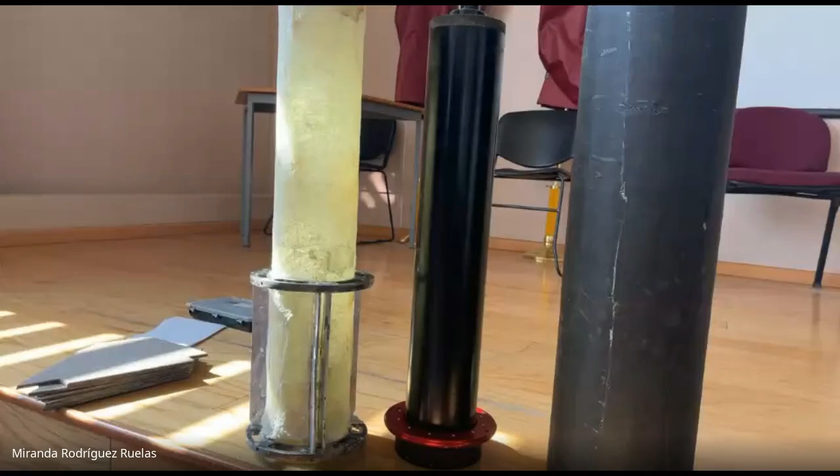And of course, how are we going to be assuring this? We're going to be using another layer of carbon fiber, 12K, and some epoxy resin as well. Once we have that process made, we're going to be working with the tip-to-tip method on each one of the fins, just to be double sure that everything is secure.

Do you plan to cut the slots for the fins in the body tube to the end, and then insert all the body tube with the center rings and fins, and attach maybe with a screw? Because I see in the center rings holes for screws.

Yes, what we're going to be doing is cut the slots on this body tube, which is the lower one, so that we can insert the fins, and then the fins are going to be attached at this body tube. We're going to place fiberglass with epoxy resin, and on the outside it's going to have an extra layer of fiberglass, with the tip-to-tip method.

Okay, but that assembly, what is the method that you use to attach with the body tube? You use a chemical like epoxy to attach the body tube with the fins, nose? So the attachment of the motor tube with the body tube, or the attachment of the fins with the body tube? No, all the assembly of the body tube with the fins, center rings, and the body tube.

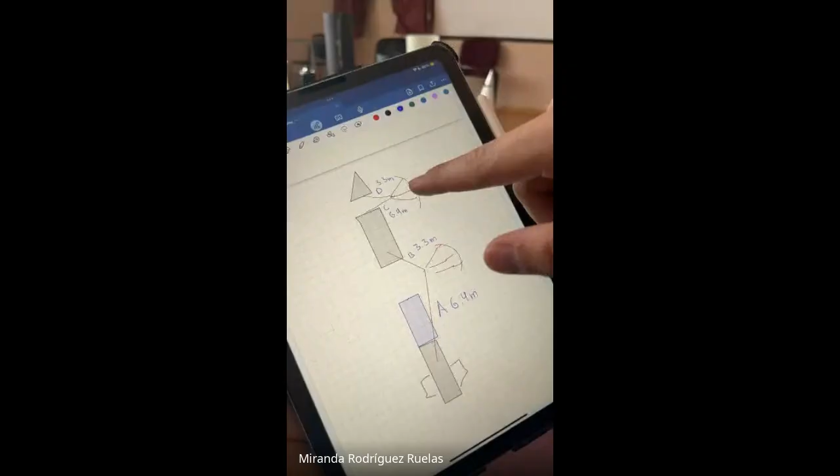3.3 meters from the nose cone to the parachute, and then 6.4 meters from...

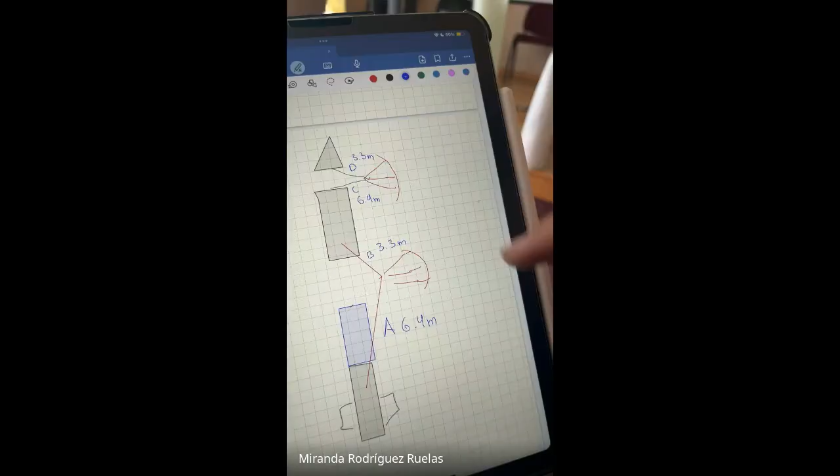The parachute between parts A and B, is that your drogue parachute or your main? Yeah, the one from the middle tube to the upper one is the drogue, and the main is the upper one.

We have a better diagram here. Can I see? Yeah, but that one only has the total length of the shock cord. You have the distance between the components?

Let me show you an example on the screen. The distance from the nose cone to the parachute is 3.3 meters, and from the parachute to the middle tube is 6.4. Then from the middle tube to the drogue parachute is 3.3 meters, and the remaining length of the shock cord is 6.4.

Okay, you can see my screen. Yes. Okay, you have two events during the recovery of your rocket. Do you mention that you have the drogue parachute in the lower frame, just behind the rocket motor? Yes. Okay, then you have this situation.

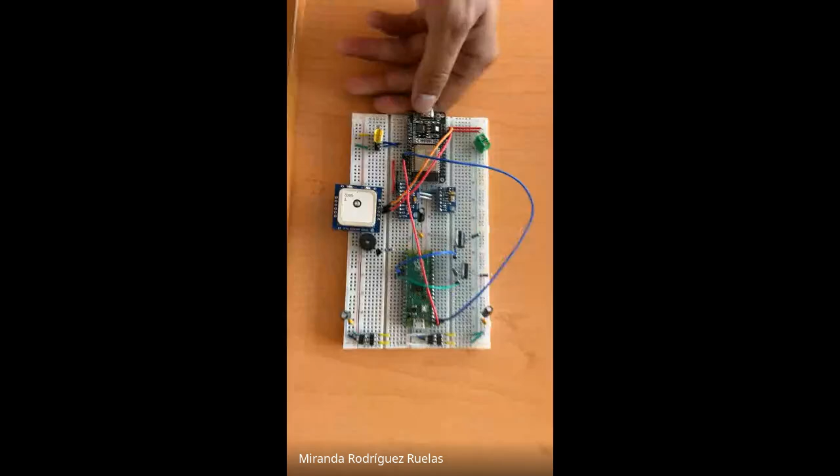For this time, we got a SRAD computer, which consists of 2 parts. The first part is run by an ESP32, which sends telemetry to the ground station. And the second part is run by a Raspberry Pi Pico, which turns on the black powder charges of the parachutes.

Is this your experimental payload, or is it your flight control avionics? Yeah, this is the flight control avionics. And you designed both of the avionics as SRAD?

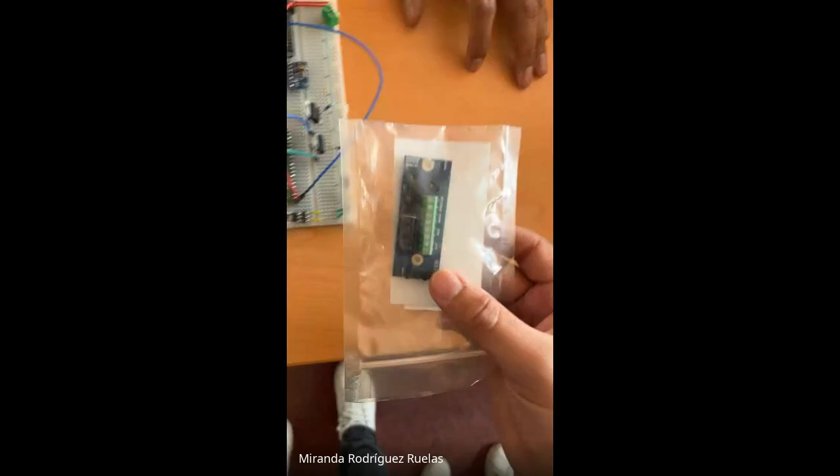You're not using a COTS altimeter. No, yes, we are using a COTS altimeter. Okay, where is it? Well, this is our RRC3, which is the altimeter that we're going to be using.

And you asked where is it at the rocket? At which section? Yes, which of the joints is going to hold your flight control avionics?

Okay, so this body tube, the fiberglass body tube, is going to have the flight computer. And the avionics, which is the payload, is going to be at this middle one too.

Okay, and first, with the avionics, how do you plan to attach the avionics? Is it in some coupler, or is it in the coupler between body tube B and C? So we're gonna be using some steel rings, on which we're gonna be connecting the CubeSat, so that we can make sure the CubeSat is gonna be stable throughout the flight of the rocket.

Okay, where for the payload, where is your altimeter going to be housed? The altimeter is going to be housed on the fiberglass body tube. In what part, coupler or within the tube itself? Yes, the altimeter is going to be inside the body tube, not the coupler.

Okay, how are you going to protect it from the black powder charges if it's going to be in the coupler, or if it's going to be in the body tube? Come again, can you repeat that question? Yes, when your black powder charges go off, if your altimeter is in the same tube with your black powder charges, the pressure wave from your black powder charge will destroy your altimeter. How are you going to protect your altimeter if it's not in one of the coupler tubes?

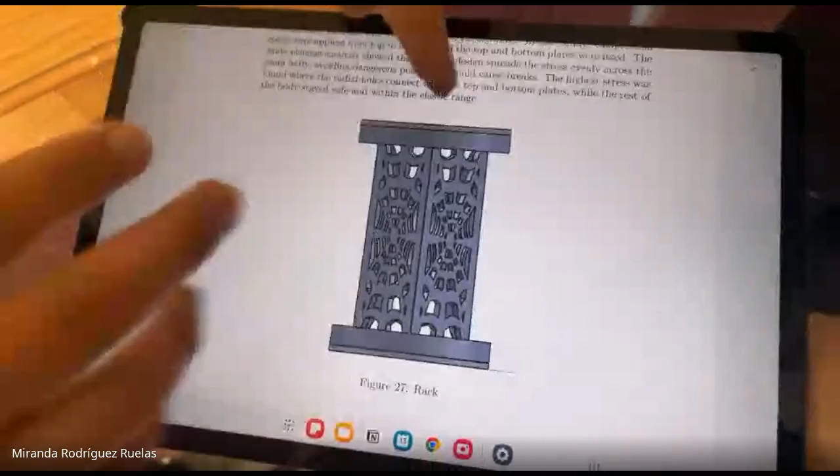Do you have that bulkhead in? Okay, yes, basically. So this is the rack or the bay that we're gonna be using to hold the altimeter. We're gonna be using two of these plates that are gonna be at each of the ends of the rack, and the black powder charges are going to be at the surface, so they're not gonna have contact, they're gonna be separated through this plate.

The black powder charges - so why aren't you putting that rack in one of your couplers? Why is it in the body tube instead of in a coupler?

So actually, this rack is going to be attached to the coupler and also a part of the body tube. It's not going to be completely inside of the body tube.

Okay, I don't understand. Do you, Walter? Let me ask in Spanish.

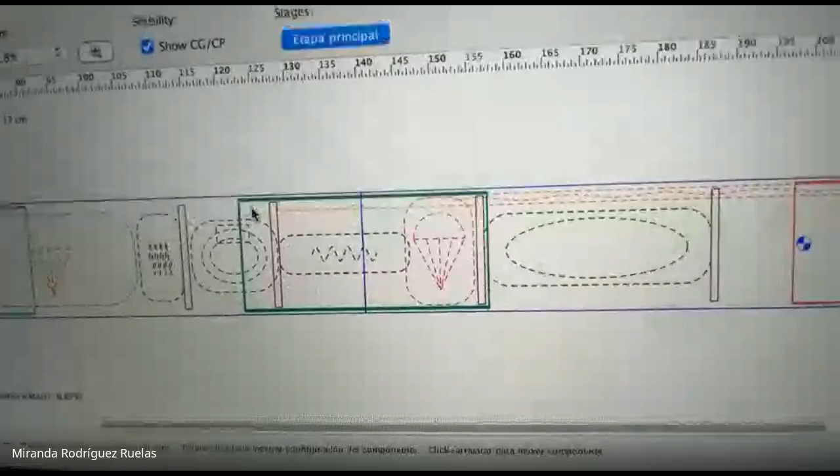Robert, this is the OpenRocket file of the team. What you see on the right side is the payload, then on the left, the drogue parachute and the shock cord. Then in red, do you see a bulkhead? The avionics is in the mouse, the black mouse is the avionics bay. I think there is one bulkhead inside the coupler, and then on the left they have another bulkhead and the main parachute.

That doesn't make sense for me, but... Okay, you understand what they're doing? Yeah, but it doesn't make sense. I understand it and a half, but not at all. Because I don't know why they don't put the avionics in the coupler, it's easier. Let me tell them.

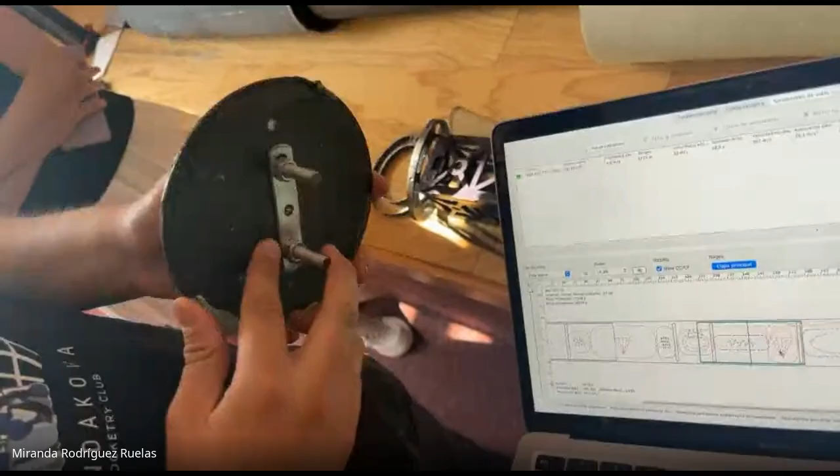Well, ¿va a estar pegado o va a estar atornillado también al fuselaje, como los...? They use screws to attach that bulkhead. Pero dos capas, no de shear pin. And what is it going to be attached to? Okay, o sea, esto va a estar atornillado en el tubo del fuselaje. Ajá, las dos placas. Both of the bulkheads are going to be screwed into the airframe.

How are you going to screw that thin piece of material into the airframe? There's no thickness there to attach a bolt to. How are you going to screw it in place?

¿Estas son las placas que vamos a usar o van a ser más gruesas? Van a ser más gruesas. Okay, so actually the bulkhead that we're showing you right now is not the one that we're going to be using, because the one that we're going to use is going to be thicker so that we have enough space. It's going to have this thickness.

Okay, Walter, are you comfortable with their plan? Because ultimately, it's your call to make here. Yeah, not at all. I need to see the physical components to see maybe the best option, but right now they don't have the component yet. The idea can work, but they have too many risks to pilot. It's not a conventional design.

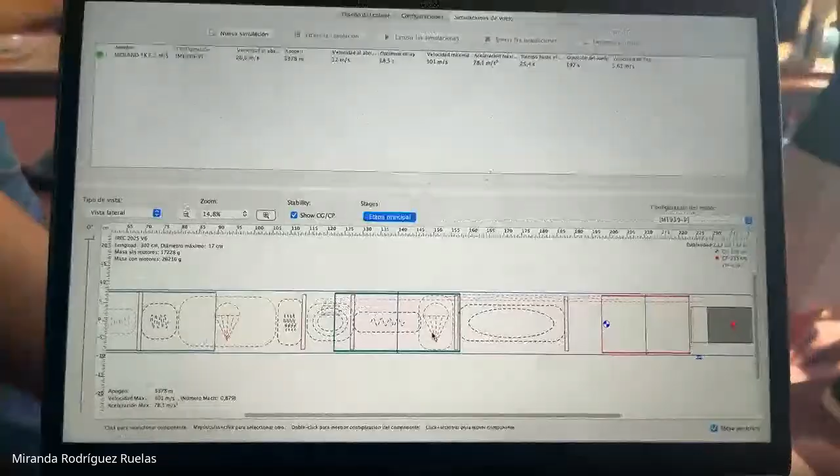So if we lower the payload, the most probable thing to happen is that we're still going to have enough stability. That's the simulated stability, okay? And what is the percent of error that you have between the simulation and the physical rocket? All the weight of the components that you have in the rocket are the same?

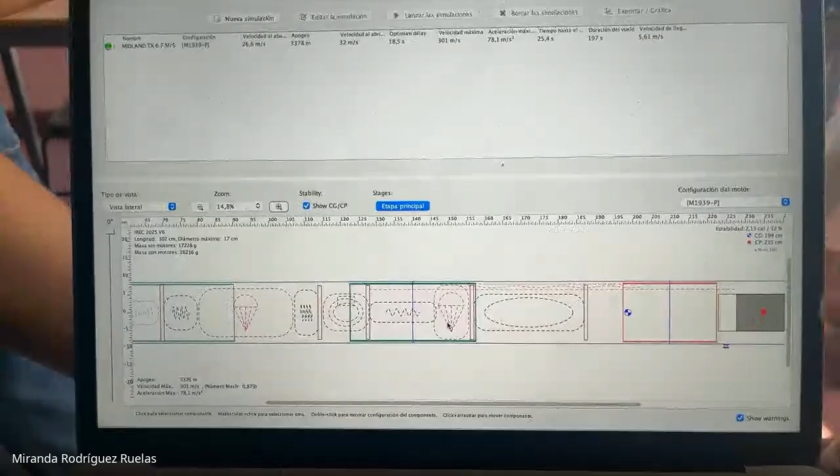So far, all of the weights of the parts in the OpenRocket file are the real ones. The weight of the body tubes, the nose cone, the bulkheads. Most of the components in the OpenRocket file have the real weight.

Okay, because for example, in that OpenRocket file, do you have enough space in the design in front of the rocket motor to put the payload? The A and B airframes don't separate at any moment during recovery. So you can maybe lower the payload, and now you do have enough space to put the recovery, the main and the drogue parachute, and use the coupler like an avionics bay.

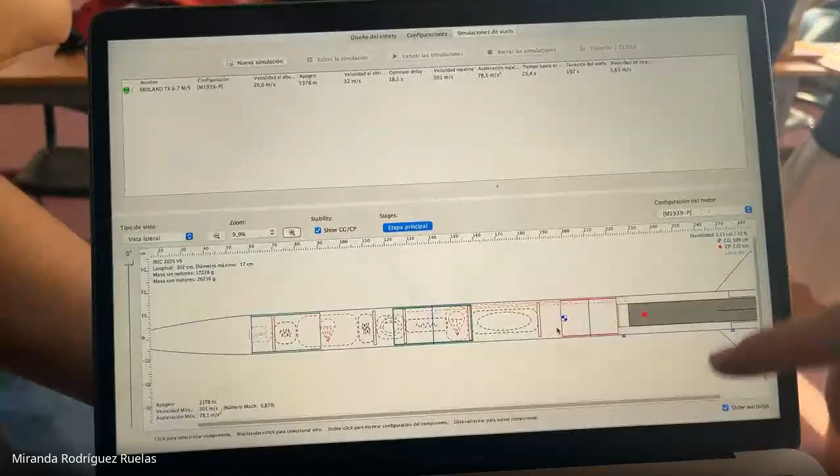Okay, perfect, yeah, of course we're going to be doing that. You're talking about having enough space between the motor tube and the middle tube, I mean the A and B body tubes, so that we can lower the payload and have enough space to put the recovery rack inside the coupler.

Is that correct? Yes, and then your drogue parachute goes into the space at the top of tube B, and your main would be up where your nose cone is now. But then you can slide all of your avionics down into your coupler tube between B and C. Okay, perfect.

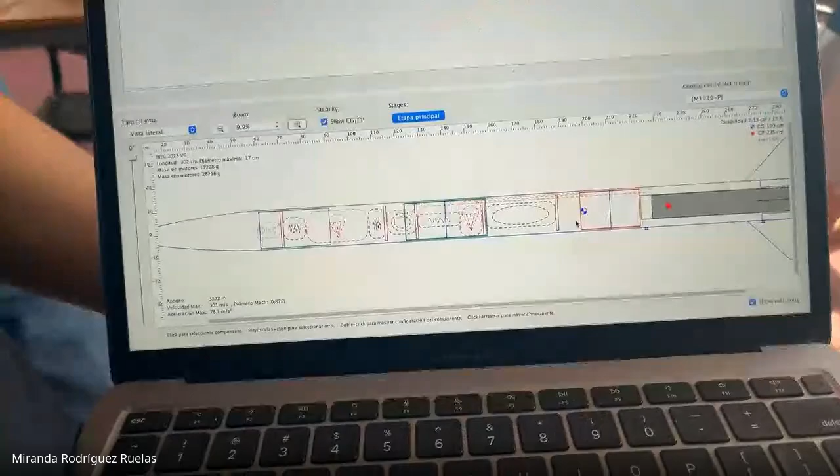That's great, if you make the updates, maybe you can send us the updated file and check to have the final design.

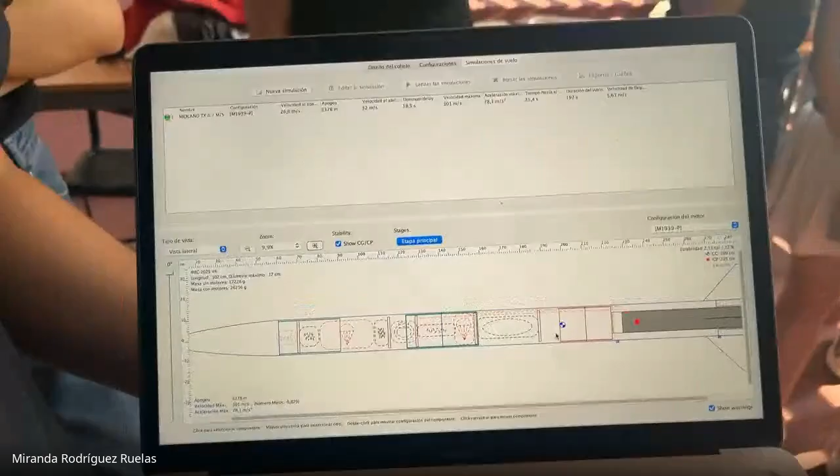You have enough time maybe to make a change, since you didn't fully assemble the rocket yet. Yeah, actually that was one of the reasons why we still did not place the centering rings and those components inside the rocket, because we wanted to make sure we were doing it the best way possible. But given the situation, the best thing to do is to modify the design so that we can fit things in a better way.

Okay, so as soon as we modify the design, we will send it to you. Okay, thanks, and if you have any question about the recommendation, just tell us and we can help you. Thank you so much, we really appreciate it.

Now maybe we can move on to the type of deployment. Do you plan to use black powder? How many grams? And do you have the container that you use?

Our drogue parachute will have 4 grams, and as backup 5 grams, and our main parachute will have 6 grams, and as a backup 7 grams. This is according to our simulation calculations.

Okay, and do you plan to make the ground deployment test in the competition or before the competition? In the competition. Okay, both, I'm sorry, both. We will do both tests. Okay, thanks, that's the container for the deployment charge.

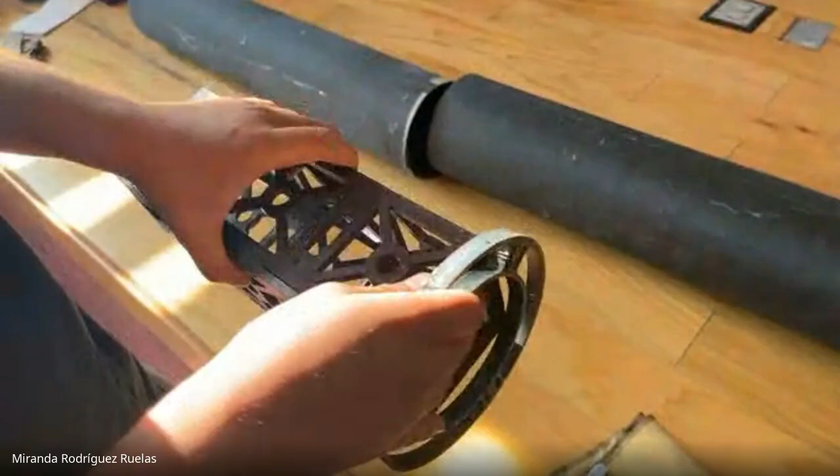What is the plan to attach that payload to the body tube? We're going to be using centering rings to hold the payload, one at each end, and the centering ring is going to be attached to the airframe using bolts. How many bolts, and is the material the same, stainless steel? Yes, stainless steel, and there will be 3 bolts.

Okay, thanks. One more thing about the avionics, about the batteries. What type of batteries do you plan to use? We are using 2 9-volt alkaline batteries.

Now about the switch. How many switches, and do you have external access for the switch to turn on the avionics? Yes, we're going to be using 2 switches, and we'll have access from the body tube, just like we're doing with the nose cone, with an external switch. We're going to place the switches so that we can access them through the body tube.